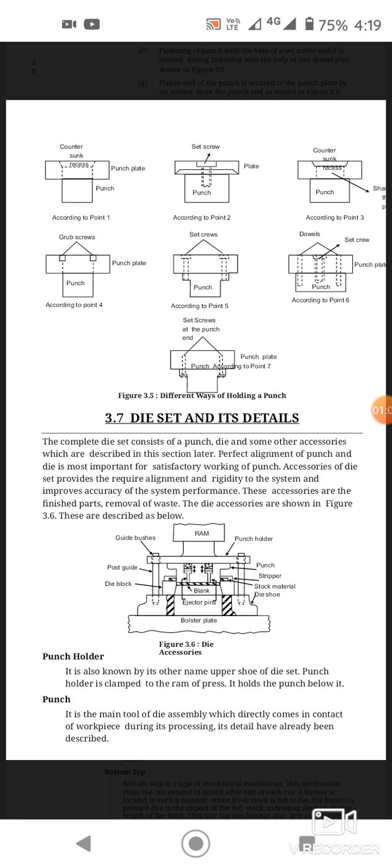The die set is very important for producing the required shapes. Die set is very important for manufacturing shapes; it is used in sheet metal workshops. The complete die set consists of a punch and a die. The die is attached on the work table, and the punch is attached to the ram, and some other accessories which are described in this section later.

Perfect alignment of punch and die is most important for satisfactory working of the punch. Accessories of the die set provide the required alignment, assembling the punch and die, and rigidity to the system, and improve accuracy of the system performance. These accessories handle the finished parts and removal of waste. The die accessories are shown in the figure.

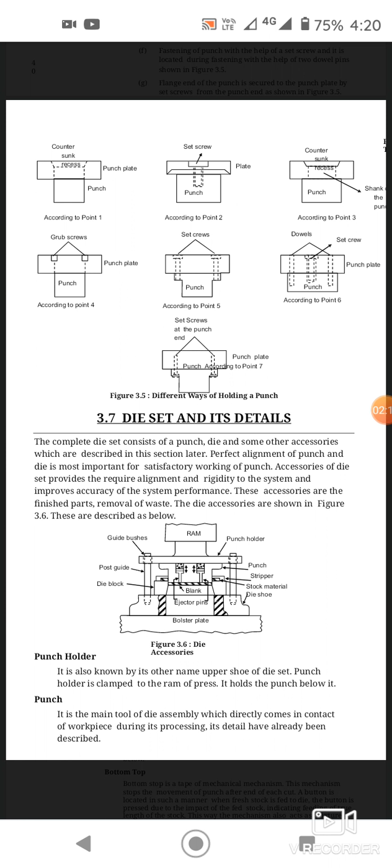These are described below. This is the ram, guide bushes, punch holder, guide post, die block, blank, ejector pins, bolster plate, stock material, die shoe, stripper, and punch.

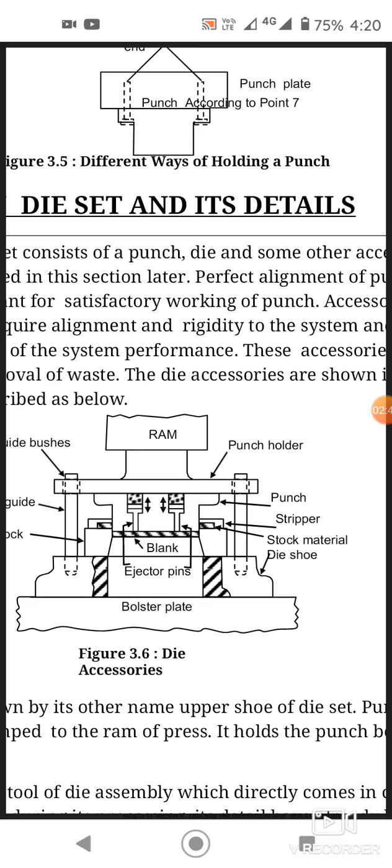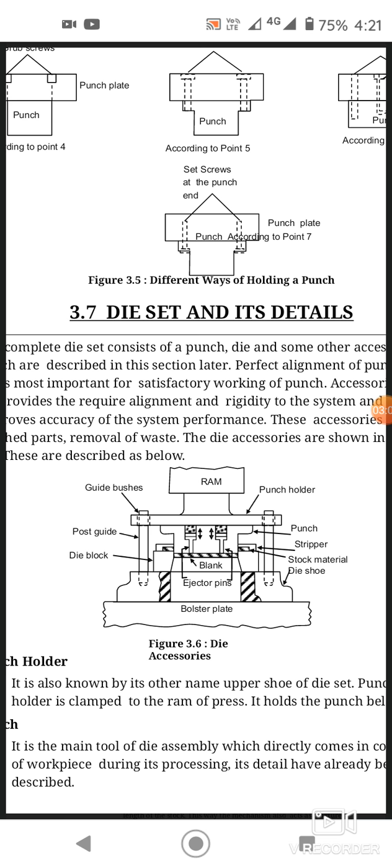First one is the punch holder. The punch holder is also known by its other name, upper shoe of die set. The punch holder is clamped to the ram of the press. It holds the punch below it. The workpiece is located on the die set, on the work table. The punch comes downward in a single stroke, and the workpiece gets the required shape of the die.

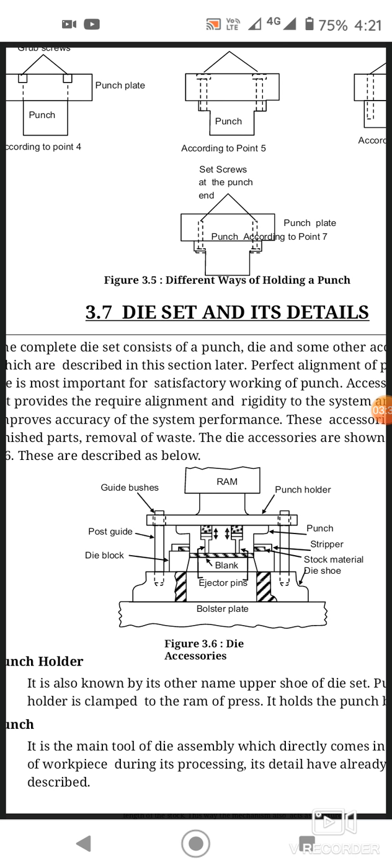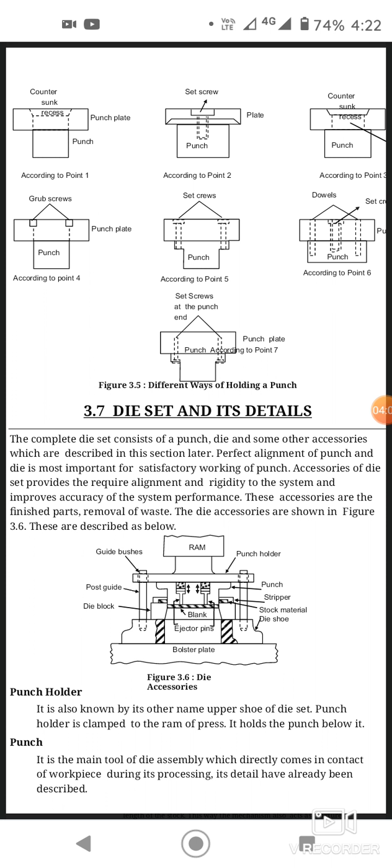Next one is the punch. The punch is attached to the ram, and it strokes a single stroke on the die, then the workpiece gets the required shape. It is the main tool of die assembly which directly comes in contact with the workpiece during its processing. Its details have already been described.

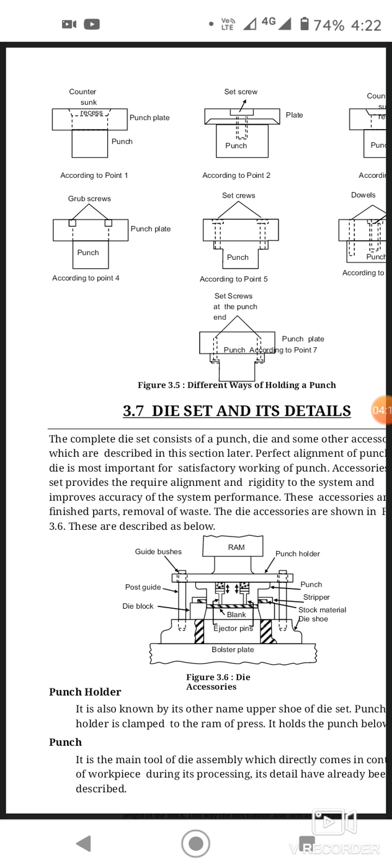Then die holder. The die holder is also called a die shoe. It works as support for the die block, and it is rigidly fastened to the bolster plate of the press.

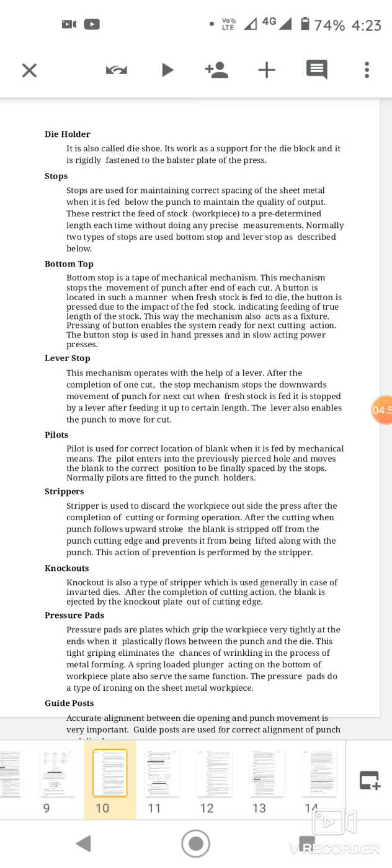Stops are used for maintaining correct spacing of the sheet metal when it is fed below the punch to maintain the quality of output. The workpiece is located on the work table. There is no distortion or change in the shapes by using the stoppers during the punching operation. It is very important to maintain the quality of output.

These restrict the feed of stock, the workpiece, to a predetermined length each time without doing any precise measurements. Normally, two types of stops are used: bottom stop and lever stop. First one is the bottom stop. The bottom stop is a type of mechanical mechanism. This mechanism stops the movement of the punch after the end of each cut.

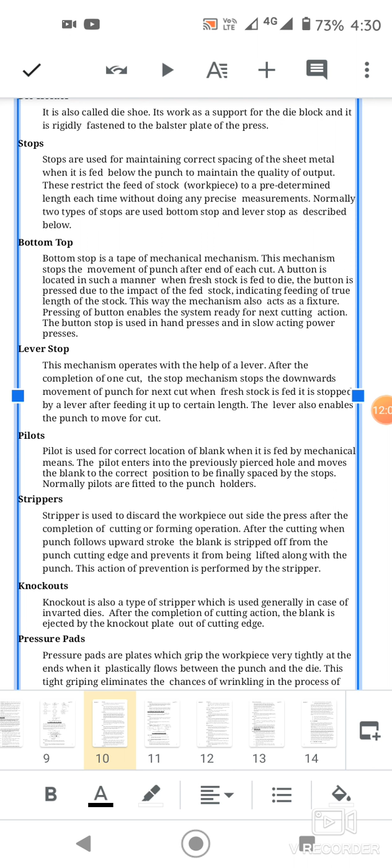The punch cutting edge prevents the strip from being lifted along with the punch. And for knockouts, after completion of the cutting action, the blank is ejected by the knockout plate out of the cutting edge.

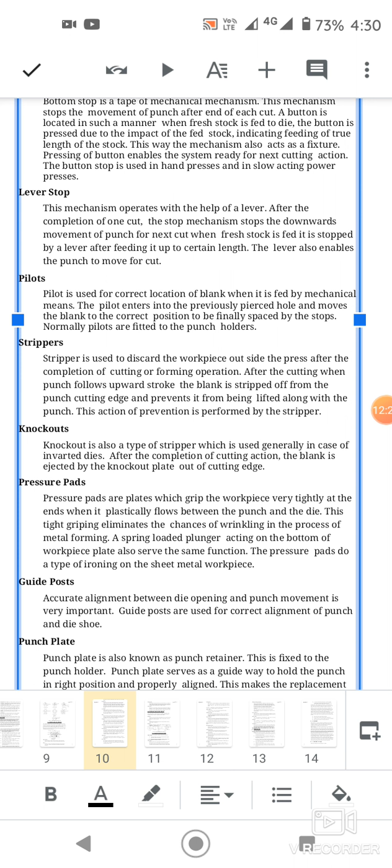Guidepost. Accurate alignment between die opening and punch movement is very important. Guideposts are used for correct alignment of punch and die shoe, ensuring there is no distortion of the die and punch. If there is some distortion of the punch and die, quality pieces cannot be produced.

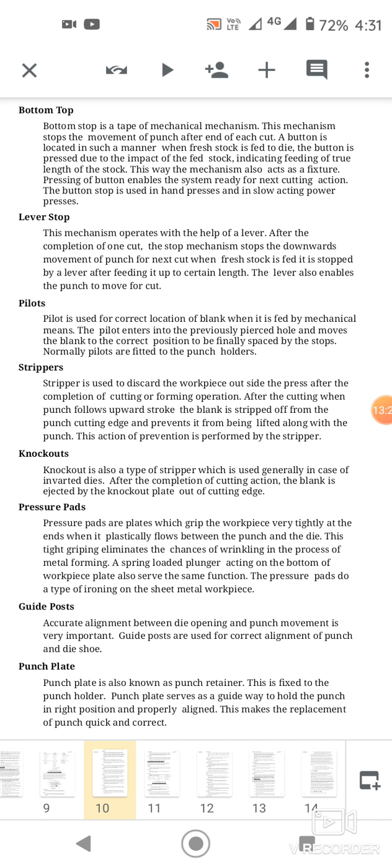Punch plate, also known as punch retainer, is fixed to the punch holder. The punch plate serves as a guide way to hold the punch in the right position and properly aligned. This makes the replacement of punch quick and correct.

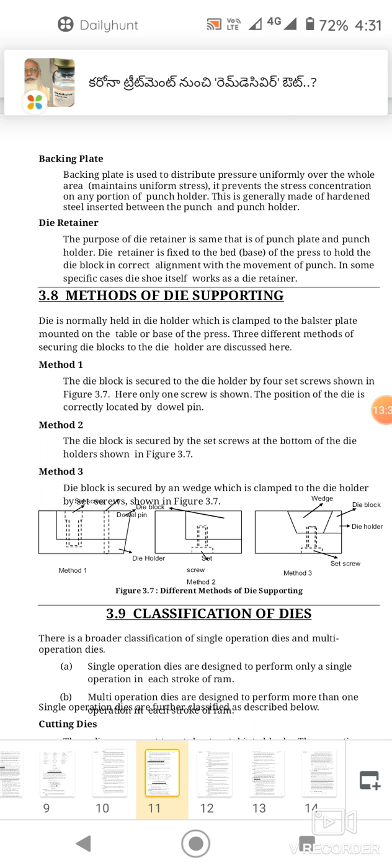Backing plate is used to distribute pressure uniformly over the whole area, maintaining uniform stresses. It prevents stress concentration on any portion of the punch holder. This is generally made of hardened steel, inserted between the punch and punch holder, where the punch is located.

Die retainer. The purpose of the die retainer is the same as that of the punch plate and punch holder. The die retainer is fixed to the bed, meaning it is a base, made of grey cast iron or cast iron. It controls vibrations during operation of the press and holds the die block in correct alignment. With the movement of the punch, in some specific cases, the die shoe itself works as the die retainer.

Next one is the methods of die supporting. Methods of die supporting are very important for locating the workpiece and manufacturing at a particular place of the workpieces.

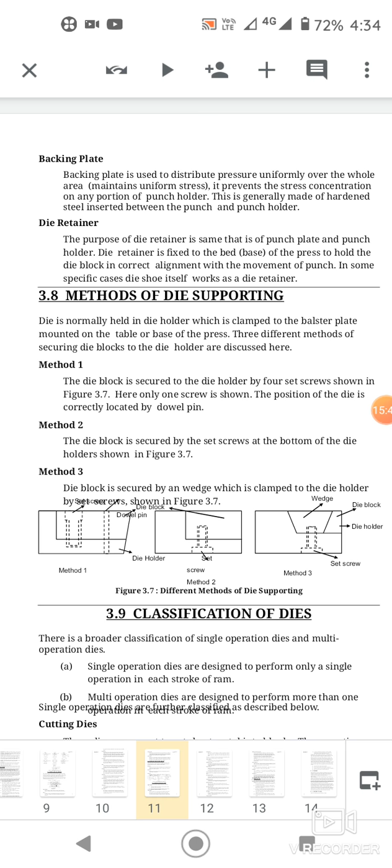The die is normally held in a die holder which is clamped to the bolster plate mounted on the table or base of the press. There are three different methods of securing the die block to the die holder. Method 1: the die block is secured to the die holder by 4 set screws shown in the figure at the 4 sides; here only one screw is shown. The position of the die is correctly located using the dowel pin.

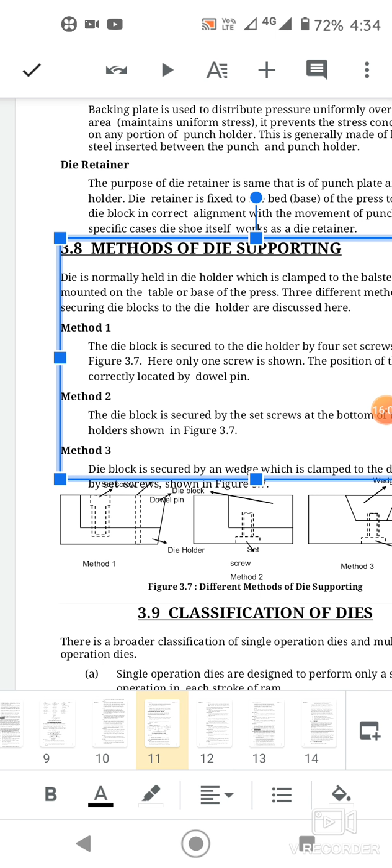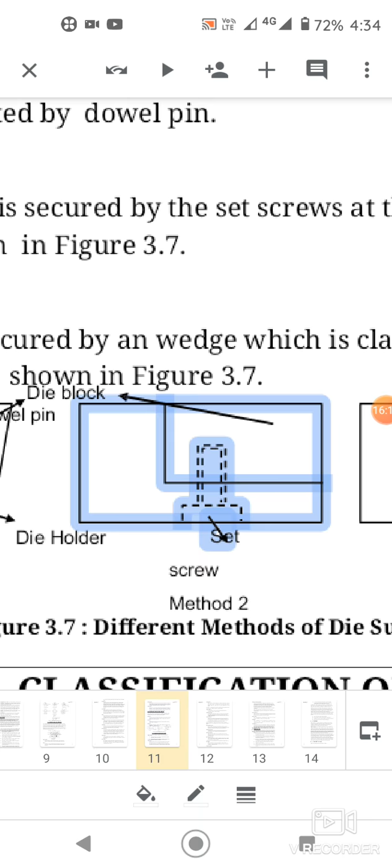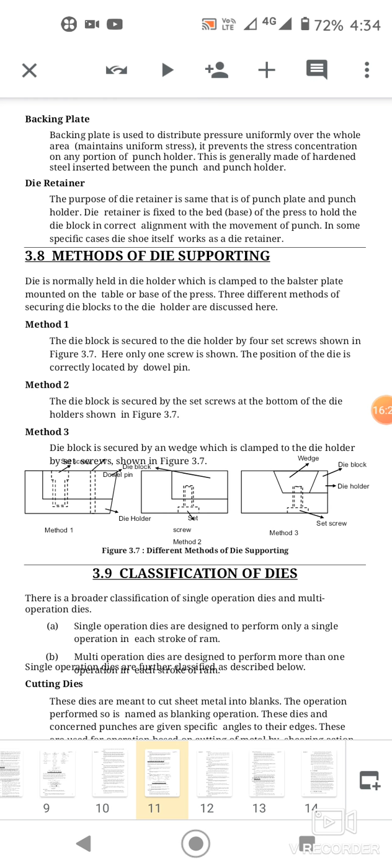Method 2: the die block is secured by the set screw at the bottom of the die holder, as shown in figure 3.7. Method 3: the die block is secured by a wedge which is clamped to the die holder by a set screw, as shown in the figure - this is the wedge, die block, die holder, and set screw.

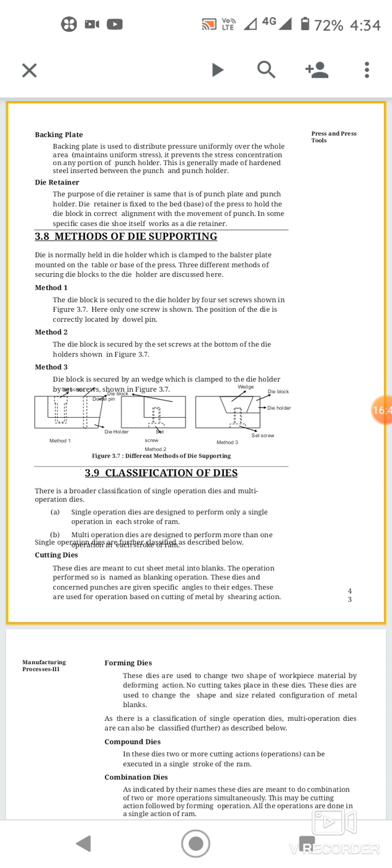Next one is the classification of dies: single operation dies and multi operation dies. Single operation dies are designed to perform only a single operation in each stroke of the ram. Multiple operation dies are designed to perform more than one operation in each stroke of the ram.

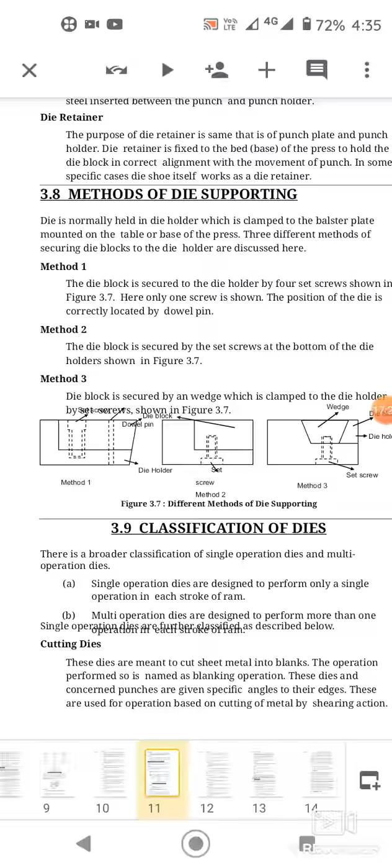Cutting dies are meant to cut sheet metal into blanks; the operation performed is named blanking operation. Blanking operation is a sub-process of cutting out a desired shape from the strip or sheet by a single blow of the punch. The product of blanking is a finished product or may be used for subsequent cold forming process. Blanking and piercing operations are cold working and cold forming processes. The sheet left with a hole on the dies goes as waste. The size of the die determines the size of the blanked part, and clearance should be given to the punch. Blanking is usually the fastest and most economical process for flat parts, particularly in large quantities.

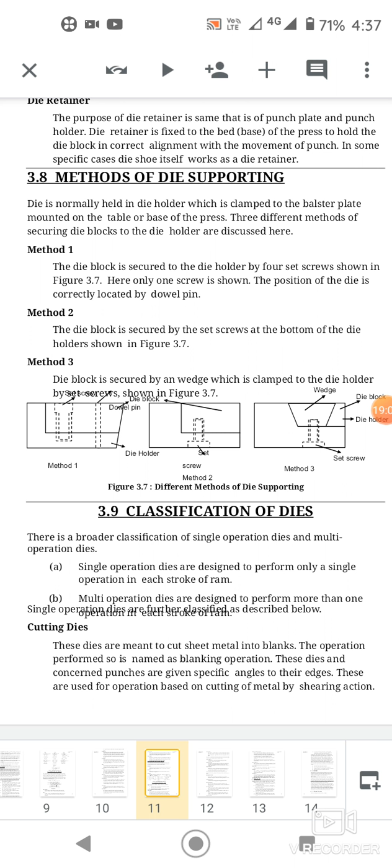For cutting dies, these dies and concerned punches are given specific angles to their edges. These are used for operations based on cutting of metal by shearing action.

Next one is the forming die. Forming die is one type of die operation. These dies are used to change the shape of workpiece material by a deforming action; no cutting takes place in these dies. These dies are used to change the shape and size related configuration of blanks.

As there is a classification of single operation dies, multi operation dies can also be classified. The first one is a compound die, where two or more cutting actions or operations can be executed in a single stroke of the length of the ram.

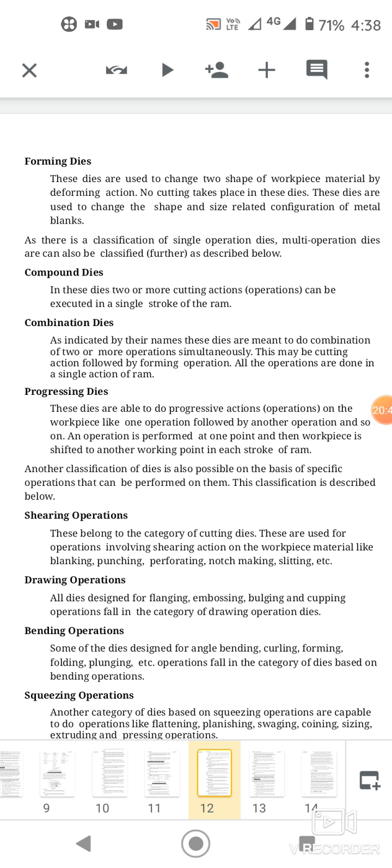Compound die: when the RAM descends, the blanking and piercing operations are performed simultaneously. The two operations are performed in the compound die. For blanking operation, the punch used for piercing becomes the die. Blanking is done in opposite direction to that of piercing.

This die is very economical. It leads to saving in floor space and power, and the accuracy of the part produced is higher.

Next is the combination die. As indicated by their name, these dies are meant to combine two or more operations simultaneously. These may be cutting action followed by forming operation, all done in a single stroke of the RAM. Combination die is similar to compound die, except that in combination die the cutting operation is combined with forming operation. These operations are performed in a single stroke of the RAM at different stations.

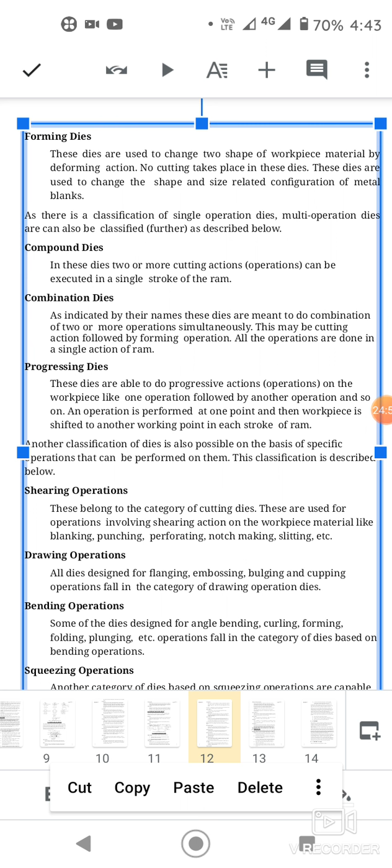Another classification of dies is possible on the basis of specific operations performed: shearing operation, drawing operation, bending operation, and squeezing operation. First is the shearing operation.

Shearing operation is used in sheet metal workshops. It is defined as a single piece being separated into two pieces using a shearing machine. These belong to the category of cutting dies, used for operations involving shearing action of the workpiece material, like blanking, punching, notching, and slitting operations.

Next is the drawing operation. Drawing operation dies are designed for flanging, embossing, bulging, and cupping operations. Cupping operations fall in the category of drawing operation dies.

Next is the bending operation. Bending is a cold working process consisting of uniformly straining a flat sheet or strip of metal around a linear axis. Metal on the outside of the bend is stressed in tension while the inside is compressed, and the metal tends to become slightly thinner at the bend, for a flat strip of metal. Bending methods are divided into V-bending and edge bending operations.

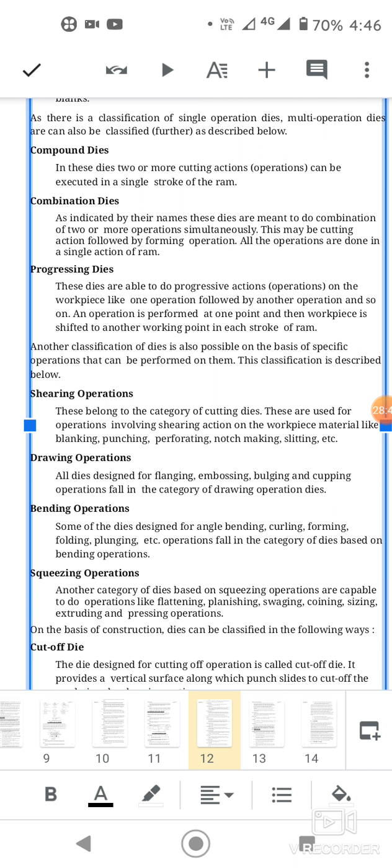Next is the die designed for cutting off operations, including cutting off and parting off operations, called a cut-off die. It provides a vertical surface along which the punch slides to cut off the workpiece by shearing action. Cutting off and parting operations sever a piece from a strip by cutting along a single line, where the width of the cut is neglected.

Parting is the process of separating a piece from a strip by removing scrap. The width of the cut is equal to the thickness of the scrap removed.

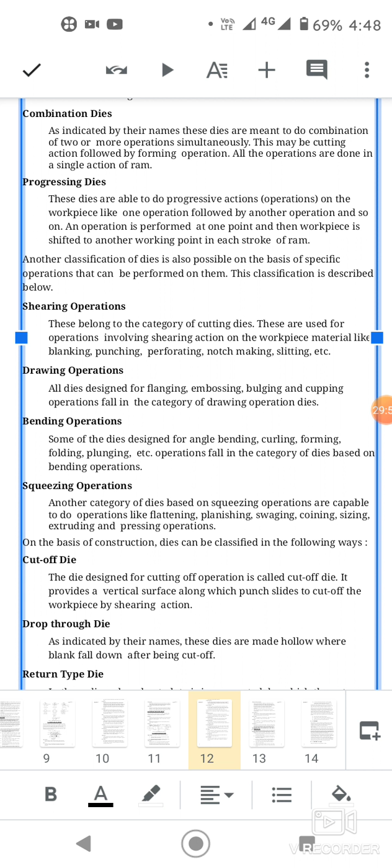Next is the drop-through die. As indicated by their name, these dies are made hollow so the blank falls down after being cut off. In return-type dies, a knockout plate is incorporated by which the cut blank returns back to the position at which it was cut.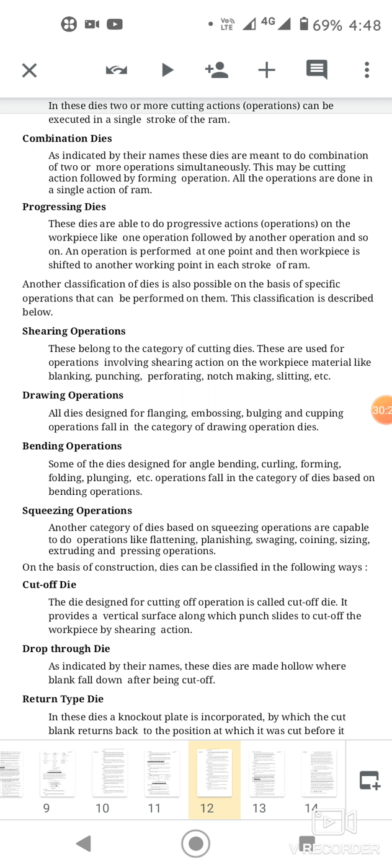Next is the simple and compound die.

Simple die: only a single operation is performed for each stroke of the ram. The simple die may be classified into two types: cutting dies and piercing dies. Cutting die is used for cutting operations such as blanking and piercing operations.

Piercing die: piercing or punching is the operation of making holes in a sheet metal by the punch and the die. The material cut from the sheet is scrap. Any piercing die consists of a pair of matching members, that is the punch and die.

In a single die set, the punch holder is mounted to the upper shoe, whereas the die is inserted in the lower shoe. For piercing, the punch is made to size and the die is made larger by adding clearance. These are two different dies.

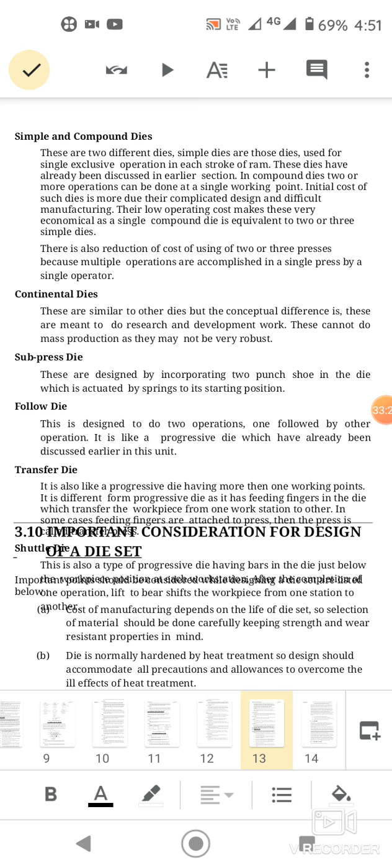Next is the continental die. These are similar to other dies, but the conceptual difference is that they are meant for research and development work. These cannot be used for mass production, as they may not be very robust.

Next are the sub-press die, follow die, and transfer die. First is the sub-press die. These are designed by incorporating two punch shoes in the die, which is actuated by springs to its starting position.

Next is the follow die. This is designed to do two operations, one followed by the other operation. It is like a progressive die, which has already been discussed.

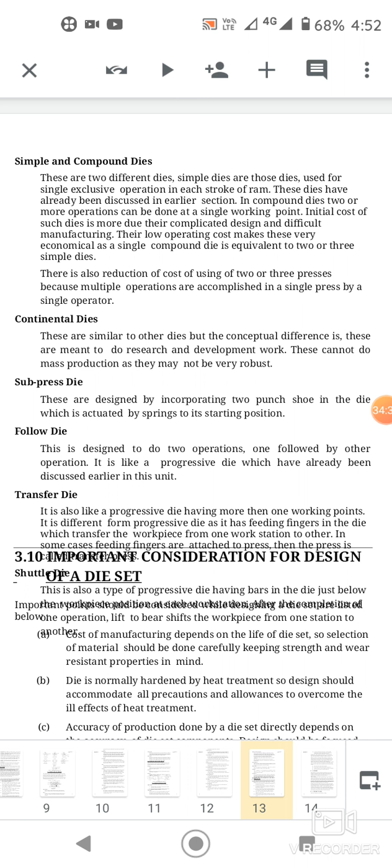In transfer die, it is also like a progressive die having more than one working point. It differs from progressive die as it has feeding fingers in the die which transfer the workpieces from one workstation to another. In some cases, feeding fingers are attached to the press. Then the press is called a transfer press.

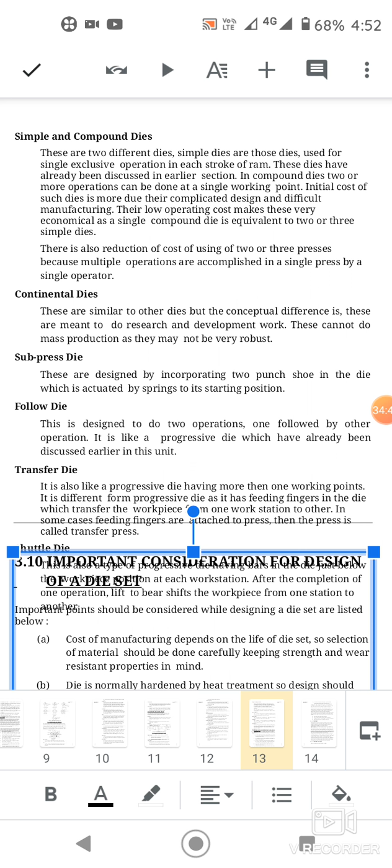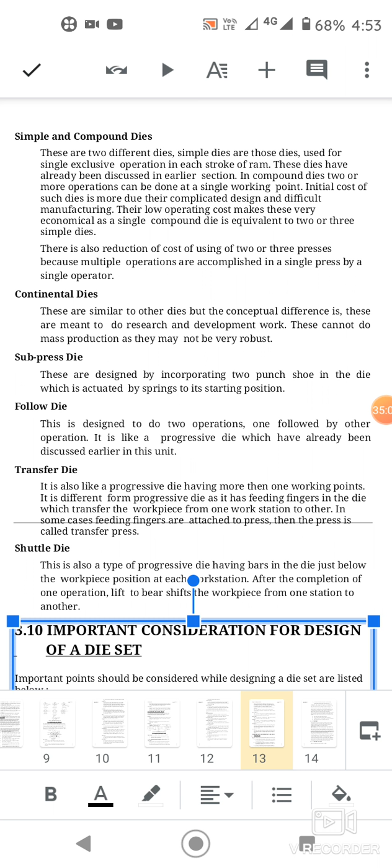Next is the shuttle die. This is also a type of progressive die having bars in the die just below the workpiece position. At each workstation, after the completion of one operation, lift to bar shifts the workpiece from one station to another.

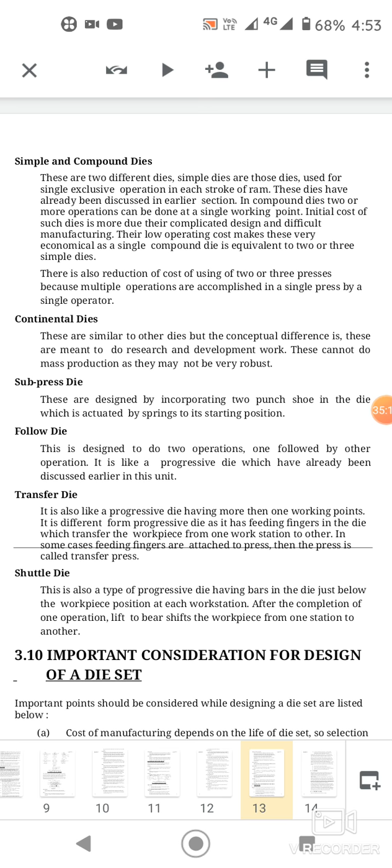This is an important consideration for design of die set. Cost of manufacturing depends on the life of the die set. So selection of material should be done carefully, keeping strength and wear resistance properties in mind. Long narrow sections should be replaced by block shaped sections to avoid warpage.

Standardized components should be used as much as possible. Easy maintenance should be considered; replacement of parts should be easy. Reinforcing grips should be used as per the requirement of the sections. Die is normally hardened by heat treatment, so design should accommodate all precautions and allowances to overcome the effects of the heat treatment.

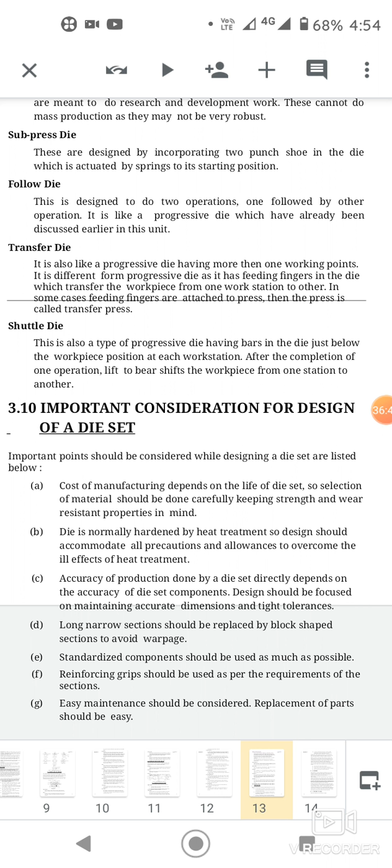Accuracy of production done by a die set directly depends on the accuracy of die set components. Design should be focused on maintaining accurate dimensions and tight tolerances, and the process should be shock proof, or shock resistant if unavoidable. Proper care should also be considered while selecting the material of components of die set.

Along with the important design considerations, one should also know about proper material selection for components of die set, including various types of tool steels with their suitability for components of die set. Their manufacturing involves processing of tool steel to make these components. Then the material is selected. Tool steel should be very hard to resist wear and strong to bear load.

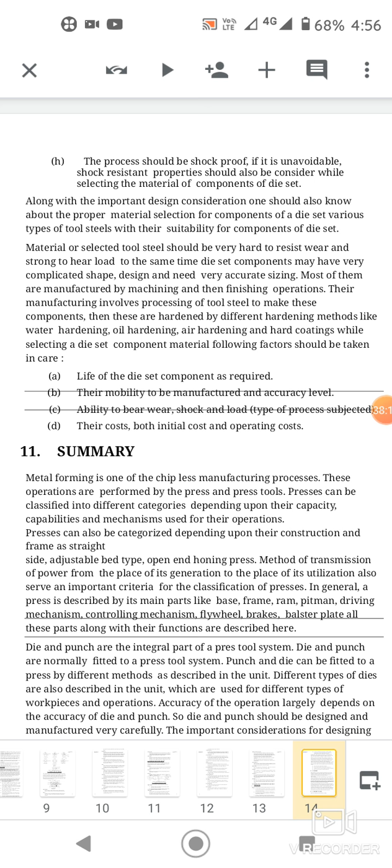At the same time, die set components may have very complicated shapes and designs, needing very accurate sizes. Most of them are manufactured by machining and then finishing operations. The components are then hardened by different hardening methods like water hardening, oil hardening, air hardening, and hard coating.

While selecting a die set component material, the following factors should be taken into care: their ability to be manufactured and accuracy level, the life of the die set component as required, ability to bear wear, shock and load, type of press subjected, and their cost, both initial cost and operating cost.

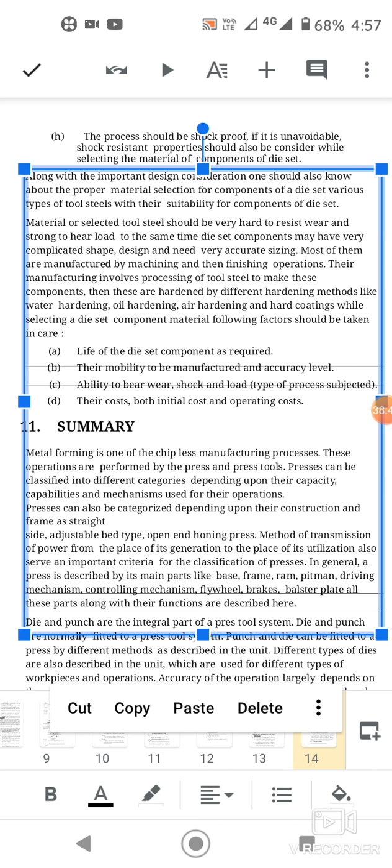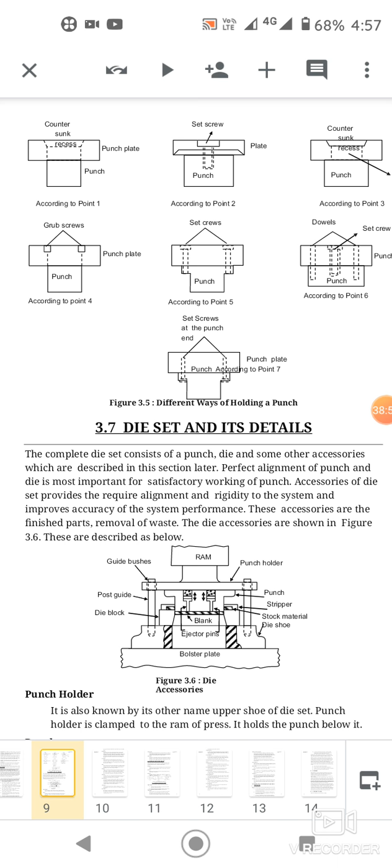This is the die set and its complete details briefly explained. Thank you.